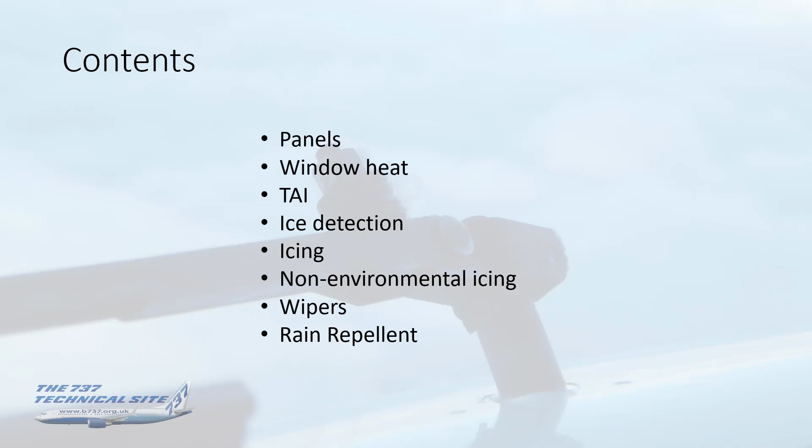Okay, back in the beginning on the original series, the 1 and 200s, there were several significant differences from later generations. The first one was that, surprisingly, although the originals had an alpha vane, it wasn't heated. There's no left alpha vane caption on the pitot static panel.

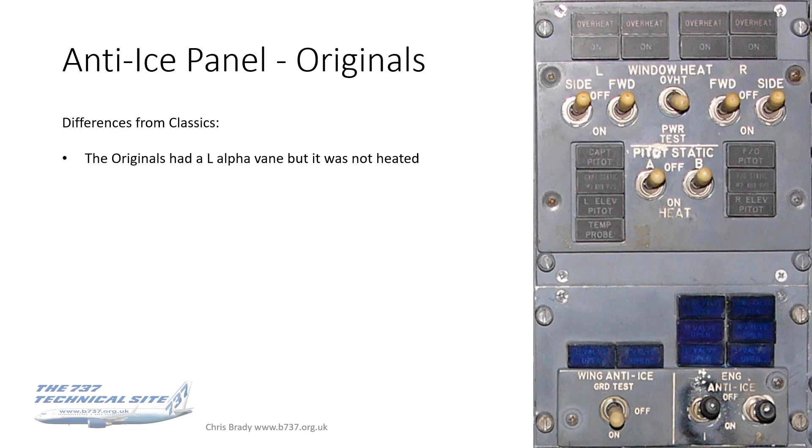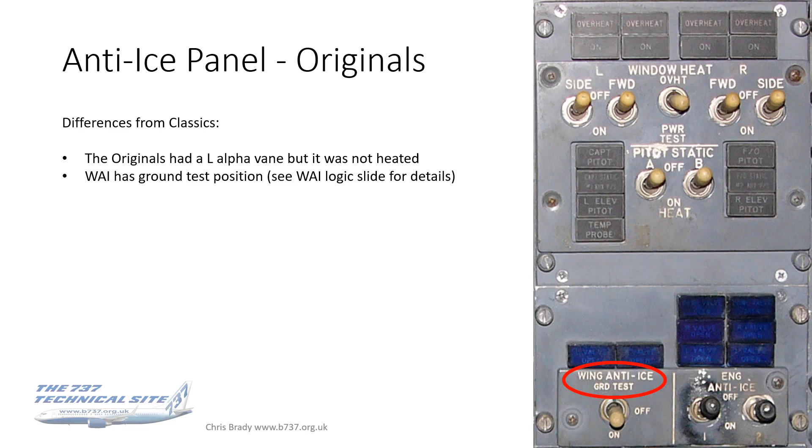The wing anti-ice had a ground test position, as you can see down there, so it's a 3-position switch. I'll come on to the logic of that on a later slide, because this was also used on classics as well.

The engine anti-ice captions were quite significantly different. So cowl valve open, this one was actually the same as later generations. It shows that the engine nose cowl leading edge is being anti-iced by 13th-stage bleed air, tempered with ambient air. That's a slight difference, because bleed air on its own would be too hot, so they actually mixed it with ambient air. But note that there was no amber cowl anti-ice caption, just the blue cowl valve open.

The difference captions were these left and right valve opens in blue. They show that the engine inlet nose dome, so the spinner, was heated. Also the compressor inlet case and inlet guide vanes. They were all anti-iced by 8th-stage bleed air, and all of this was unique to originals.

I think there's a school of thought which would say that having the spinner de-ice was quite useful. I've certainly encountered some quite strong icing on the spinner. But of course, those of you that have seen my powerplant presentation will have seen the development of the spinner from conical to elliptical to coniptical, to try and eliminate the need for anti-icing there.

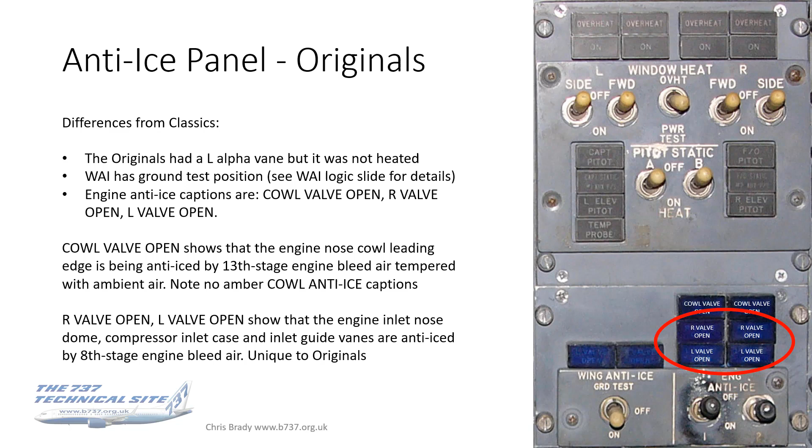Anyway, I digress. So with the classics, there were the following changes: the left and right alpha vanes, because there were 2 on classics and later generations. They had heated probes and were annunciated, as you see there.

Only 1 temperature probe. Oddly enough, many of the originals had 2, but at least it was heated.

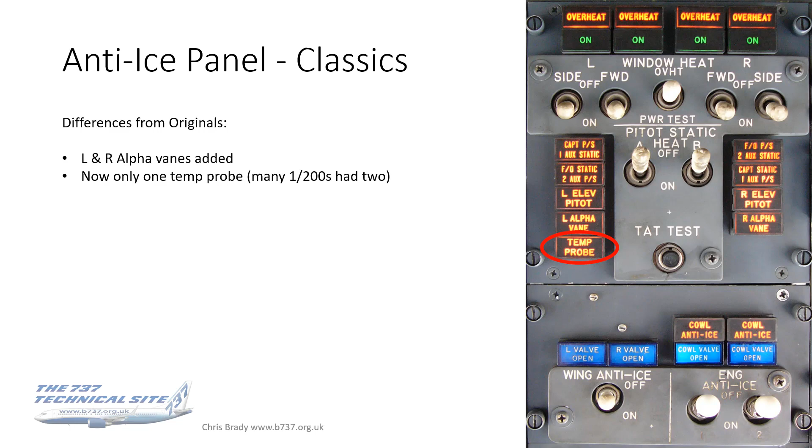The TAT test button made an appearance with the classics. Now this is only fitted on aircraft with an aspirated temperature probe, so you can tell by looking at this panel whether your temperature probe is aspirated or not.

So the probe was unheated on the ground to prolong the life of the element. So you wouldn't quite know whether it was heated or not by switching the pitot statics on. So that's why you've got the TAT test button.

If you press this, it simulates an airborne condition and allows the probe to heat up. So if you press that and an amber light illuminates, then you've got a fault on it. If you've got the pitot statics off, you won't see any change because they'll all be extinguished. If you've got the pitot statics on, pressing this will illuminate that light. So it's just testing an airborne condition.

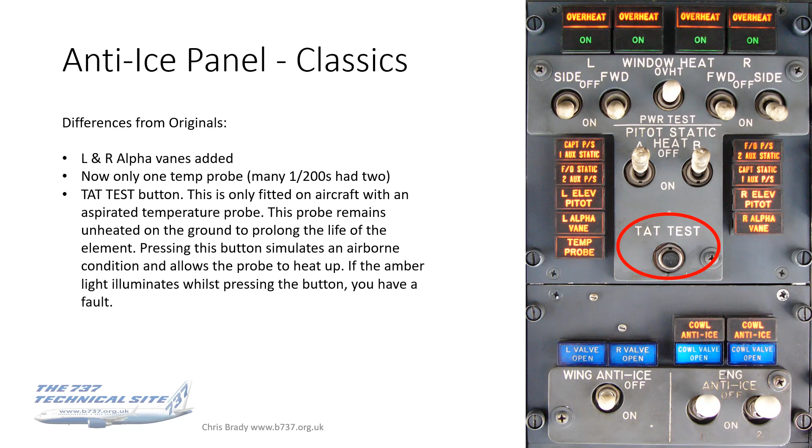On the NGs, there's an optional either green on or amber off lights with the window heat. The photo here is actually of the green on. With the amber off lights, this is just fitting in with the dark cockpit concept, so you won't have the 4 green lights blazing into your eyes on a night flight.

What you will see with the window heat on and functioning normally is nothing, which is great. If there's a fault with the window heat, then you will get an amber off light.

The panel's called a subtle difference here. It's actually called probe heat, and on the originals and classics, it was called pitot-static heat. The reason they needed to change it was because the static ports are not actually heated anymore, so they can't really call it pitot-static heat.

I've highlighted the difference there that you can see with, well, in this example, Captain's pitot. So the statics are now no longer heated. That's the takeaway point from there. Auxiliary pitot is now a thing and is added, and is heated.

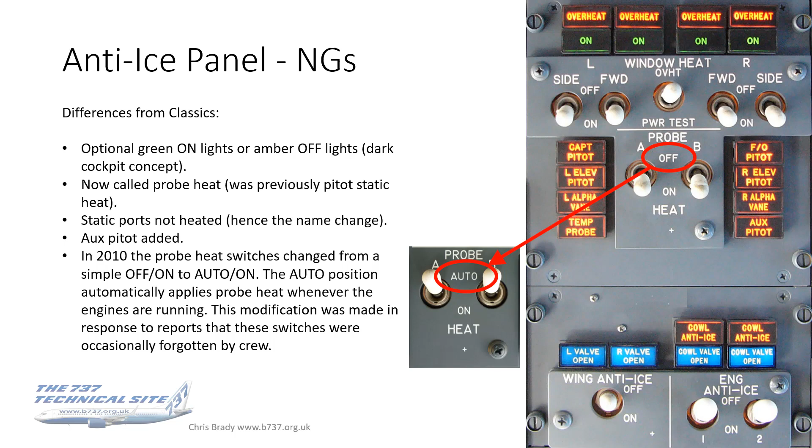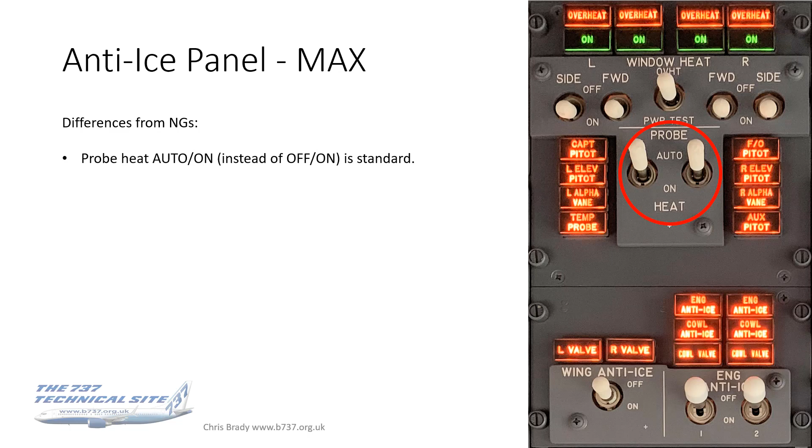On the Max, the auto-on probe heat position that I've just been speaking about is now standard. The engine anti-ice panel has got a new amber caption, which is engine anti-ice. So we're actually back to the stack of 3 captions that we had way back on the 1/200 series. I mean, obviously they're different, but it's interesting to see it come full circle.

These engine anti-ice captions illuminate when the engine cowl anti-ice system has been inhibited due to a system failure, or when the engine core anti-ice valve fails closed. So it's telling you that there's a problem with the anti-ice and it's no longer being supplied.

The other change is that these 4 lights along the bottom row, if you recall, they all used to be blue, and they all had the word 'open' at the end of them - so it was left or right valve open, cowl valve open. What Boeing have done is they've removed the word 'open' and changed the logic, and got rid of the blue. Now they will only illuminate if they're in transit, which is normal, or if the valve's in disagreement with the switch position - in other words, it's not working as intended.

So if you were to switch wing anti-ice on and you weren't getting wing anti-ice, you would have one or both of the valve lights in amber, and the same with the engine anti-ice. So again, for my money, this is an improvement. It's a bit more logical, and it's showing better functionality than the old blue light system, and it keeps things standard with the rest of the amber caution logic throughout the aircraft. So yeah, I'm a fan of these changes.

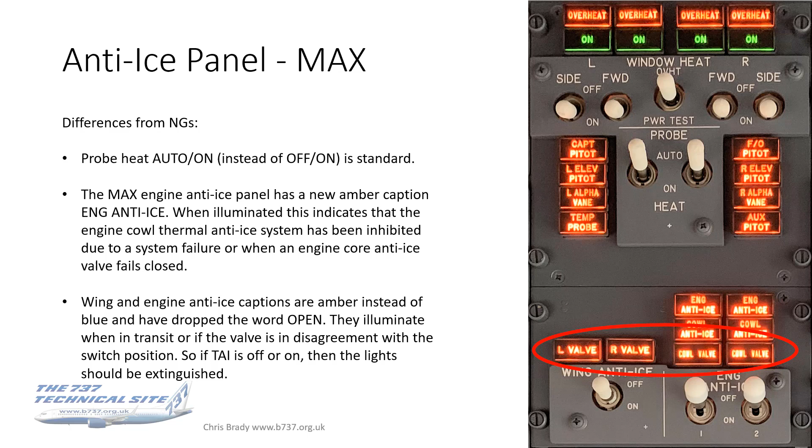All right, on to window heat. Windows 1 and 2, so the front and side window, and 4 and 5 if you've still got them installed, these are electrically heated. There is a customer option for window 3, that's the rear side window, to be heated as well.

Now the window heat works by passing a current through a conductive coating in the laminate, and this is - you can't see it, so I'm not able to photograph it for you - but this conductive strip runs the full length of the top and bottom edges of the windows to send the current all the way through.

A common misconception, if you ask some folk, is that these things I've got in the photograph are where the window heat is introduced. They're not. They are the primary and spare temperature sensors that you see in this photograph, the resistance type temperature sensor, and these feed back into the window heat control units, which I'll show you in a second.

You only need one of these to work at any one time. You've got a primary and a spare, and that really is just for ease of maintenance - that if the primary were to fail, you don't have to replace the whole window until the second one fails, because replacing the window is a big job, and it saves you getting stuck down route. So that's what these are - just temperature sensors to detect an overheat condition. They're not where the full window heat current is introduced.

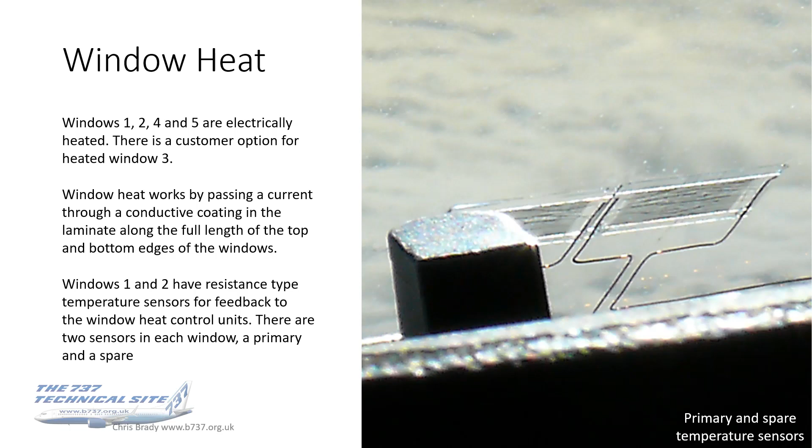So about the window heat switches: if window heat is switched on but the on light is extinguished, then that could be because the heat controller has detected that the window is becoming overheated. Now you often see this when you're parked up on a turnaround at a hot destination, and the sun's beating in through the window, and if you happen to look up at this panel, you may notice - it's often the rear side, or the left or right side windows that this happens on - that one of the green on lights is extinguished.

This is not a problem if it's a hot place. Just touch the window, and if it feels hot, then that's probably what's happened.

This window heat will be automatically restored when that window has cooled down. Now if you're concerned about it and want to verify that window heat is still available, you can do a power test. Move this spring-loaded switch in the middle down to the power test position, and the green on light will come back on.

Don't hold it there, because you don't want the thing to go to a full overheat condition, but just momentarily blip it down, check that the green on light comes on, and then you've got the peace of mind that the system's still functioning normally.

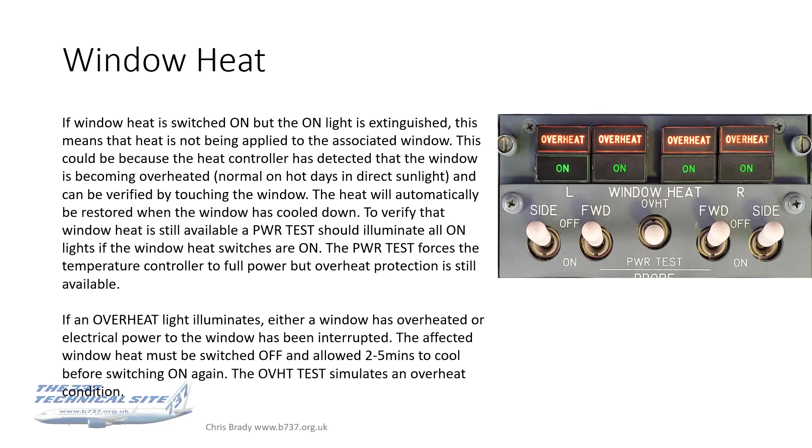So there's two stages of overheat. There's the not fully overheated, becoming warm, which will take power off, and you'll see the green on light extinguish. If it goes beyond that condition and fully overheats, you'll get the amber overheat light.

Okay, I said I'd mention the window heat control units. These are they, 4 of them, and they're in the E&E bay. I can't let one of these presentations go without showing you one of these, a unit in an E&E bay. Well, this is today's.

Obviously, as pilots, we'd never have need to see these units. It's all in the realm of the engineers, but personally as a pilot, I find it interesting to see these things and see what they're like, and see what's going on behind the scenes.

So each window heat switch, 4 switches, has got its own control unit. 4 switches, 4 control units. These control the power to the windows.

They monitor the window temperatures. They control the on, or amber off and overheat indications. They've also got BITE tests in them, which illuminate if there are faults either in the control units, the window sensors, or their power sources.

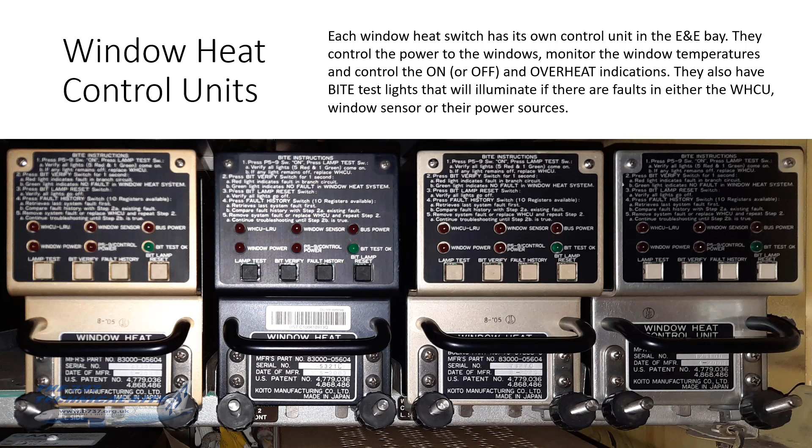So these are the brains and the computers behind each one of those little switches that you switch for window heat.

Okay, on to engine anti-ice. It uses 5th stage air, augmented by 9th stage bleed air, from the associated engine to heat the engine cowl to prevent ice buildup. The fan blades and the spinner are not heated.

Unlike the 100/200 series, where the spinner was heated and the stator vanes were, on the Classics, NG and the Max, they're not heated, which is how you can see photographs like this of ice formation on the spinner.

And where the ice also forms - this is a top tip for you when you're doing your walkarounds - you may not see the ice just because it's not on the spinner. Doesn't mean to say it's not behind the fan blades. The place where it forms first is behind the fan blades, so that might be easy to miss on a walk around.

So if you think icing conditions are or have been present, maybe worth just putting your finger behind the blades just to detect if ice is there. It forms there because that's the pressure difference between the face and the rear of those blades. That's why the ice forms there.

Engine anti-ice is an anti-icing system, so it can be used continuously and should be used continuously in icing conditions. The amber cowl anti-ice lights will illuminate if there's an over temperature, 440 degrees C, or over pressure condition in either duct. In this situation, thrust on the associated engine should be reduced if conditions allow until the light extinguishes.

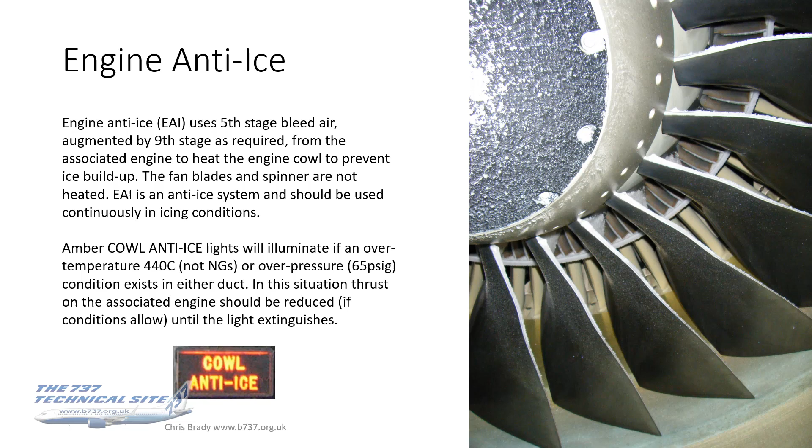Okay, on to wing anti-ice. Unlike engine anti-ice, the wing anti-ice uses bleed air from the main pneumatic manifold. This is to ensure that you've got a source of bleed air during engine out operations.

Only the leading edge slats have got wing anti-ice, not the leading edge flaps with the surfaces inboard of the engine. So it's only the surfaces outboard of the engine. And furthermore, on the NG and the Max, the outboard slat is not de-iced, as you can see from the photograph. That, I believe, is due to the excessive bleed requirements there would be if that extra slat was also de-iced.

Now, I must admit, the first time I saw it, I was a bit horrified. I mean, of course, I'd done the differences course and read the manual, but it had, I must admit, passed me by that the outer slat was not de-iced until I saw it for real.

Boeing have obviously assessed this and decided that the associated loss of lift on that outboard portion of the wing, I guess due to the taper of the wing, because the chord's so much narrower there, is not significant. The bulk of the lift of the wing comes from the inboard section. That's where the wing is thickest, that's where the greater area is. Out at the tip, there's less lift. So I guess Boeing said it's okay. Surprising, but there we go.

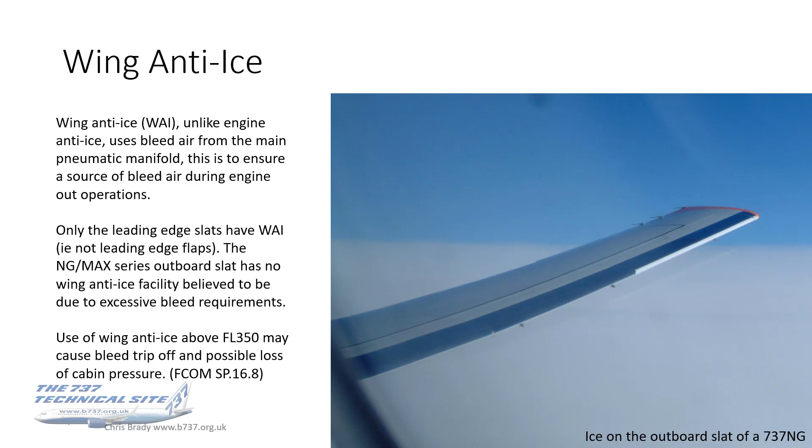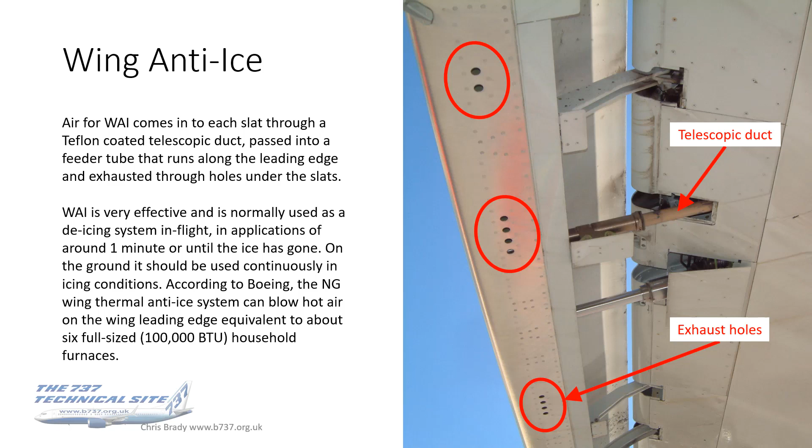On the ground, it should be used continuously in icing conditions. And a random fact for you that Boeing released: according to Boeing, the NG wing thermal anti-ice system can blow hot air on the wing leading edge, equivalent to about 6 full-size, that's 100,000 BTU household furnaces. There you go, who knew? So it's a heck of a lot of hot air.

The logic for the switches in the operation is that on the ground, the wing anti-ice valve, this is not the switch, will cut off if either thrust lever is above the takeoff warning position - that's 32 degrees on the classics or 60 on the NGs - or if an over temperature condition is detected. But it'll be restored after the thrust is reduced or the temperature drops, and it's done this way to allow you to perform engine run-ups without having to check that the wing anti-ice is still on afterwards, which is again great news for us.

It's another pilot saver there. The switch, though - because what I was just talking about there was the valve - but the switch is solenoid held, and that'll trip off at liftoff. This is for performance considerations because, as we've already discussed, the bleed air penalty for wing anti-ice is considerable.

On early systems - so this is on the lower photograph - those with the ground test position like was fitted on the originals and some classics, the wing anti-ice switch on the ground, wing anti-ice is inhibited until liftoff. So it's armed, and this is opposite to the present system, so a little bit confusing there. Fortunately, that's gone, and we've just got the nice, straightforward, very logical two-position switches that we've got now.

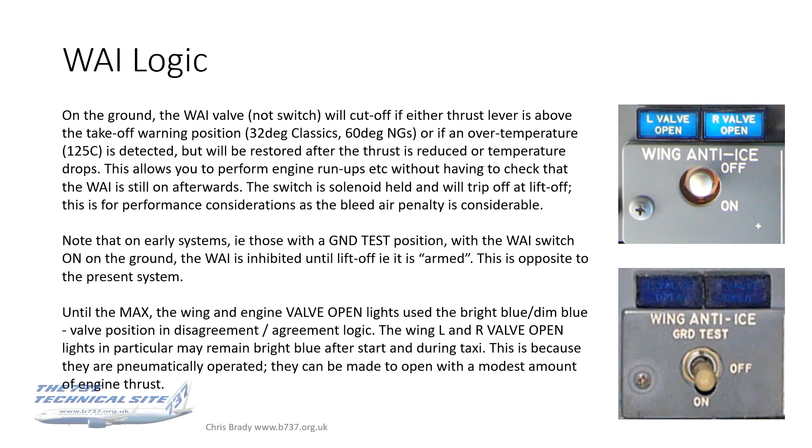The anti-ice has an effect on speed and certain limits. So whenever wing anti-ice is used, the SMYD, this is only on the NG and the Max, applies a thermal anti-ice bias. This increases the stick shaker and the minimum manoeuvre speed bars by enough to account for 3 inches of rough ice on the leading edge devices. Now, what exactly that amount is in knots depends on a whole load of things, the specific variant of the aircraft and various other factors, so that's why we can't say how many knots it puts on. All we need to know as the pilot is that it puts on enough to account for 3 inches of rough ice, which is a heck of a lot.

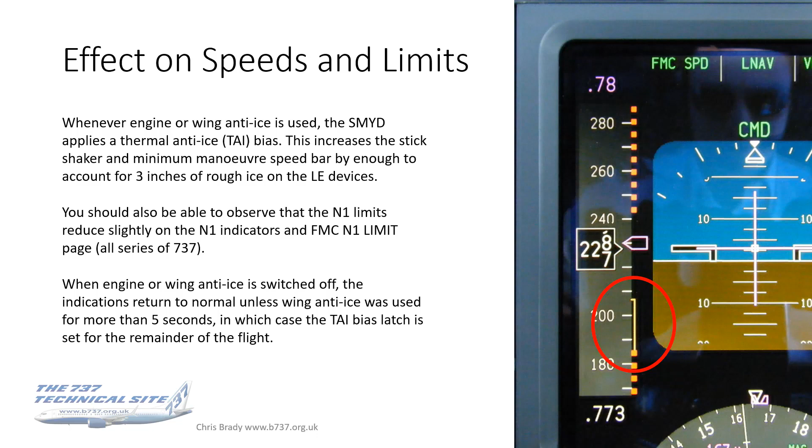You'll also be able to observe that the N1 limits reduce slightly on both the N1 indicators and the FMC N1 limit pages, and that happens on all series of 737s. When the engine or wing anti-ice is switched off again, the indications return to normal, back to where they were before, unless wing anti-ice was used for more than 5 seconds, in which case the TAI bias latch will be set for the remainder of the flight.

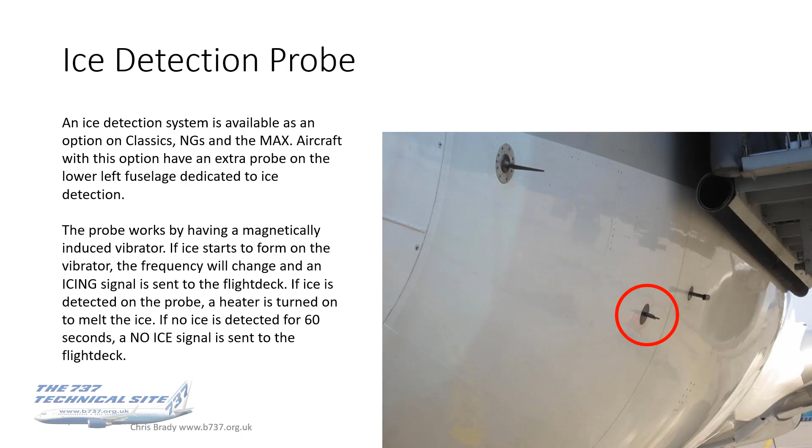Ice detection now. There is an ice detection system available as an option on classics, NGs, and even the Max. Aircraft with this option have got an extra probe on the lower left fuselage, the ice detection probe. That works by having a magnetically induced vibrator inside it, and if ice starts to form on the vibrator, the frequency of the vibration will change, and an icing signal is then sent to the flight deck. If ice is detected on the probe, a heater is turned on to melt the ice so the probe continues to function. If no ice is detected for 60 seconds, then a no ice signal is sent up to the flight deck, and in the flight deck what we see are the 2 lights up there, icing and no ice.

So when the probe senses an ice build-up, the icing light illuminates. When ice has previously been detected but the probe is no longer detecting ice, the icing light will extinguish and the no ice light will illuminate. It's a bit annoying flying these sometimes because they need to be pushed to cancel each time. I get it with the icing light, but the no ice light, really, do we need to push to cancel that? Anyway, that was the logic, and that's what we have. I guess it's better than nothing. There's also an ice detector amber light on the anti-ice panel, which will illuminate when the ice detection system fails.

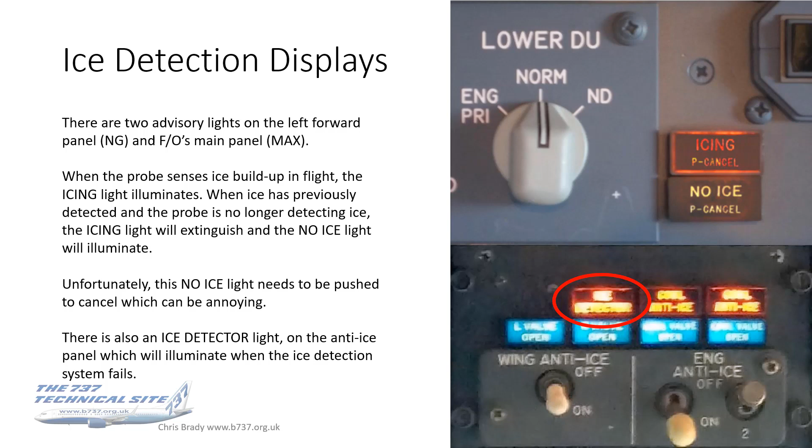Before the days of the ice detection system, on operators that had it, we just had this matte black band on the leading edge. It's entirely at the operator's discretion whether these are fitted. What I've found is that airlines that operate in northern climes have these. Norwegian have got these, and I think Maersk had them, probably SAS did as well. So they're operators which are used to operating in more conditions of icing, and I guess they found them useful. I find it's very much up to the individual crew whether you find them useful or not. They don't always work, but I guess they're better than nothing.

Now these are normally applied at the outermost point of the de-ice sections of the slats, where they can be most easily seen by crew. There's no point in putting them on the outboard slat because that isn't de-iced. But you want them on the most outboard position of where the de-icing is, so that you can easily see it from the flight deck windows. On the 800 and 900 series, and even more so on the Max 10, it's difficult to see too much of the wing because it's that bit further back.

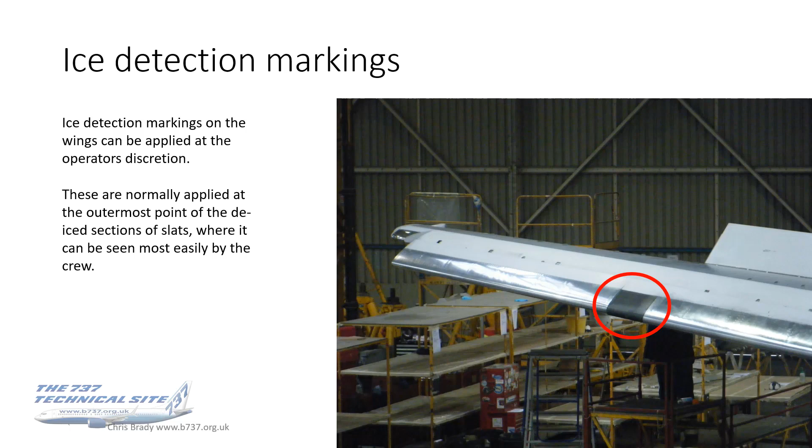Okay, so on to airframe visual icing cues. It's up to the crew to spot ice formation and take the necessary action. So what I've done over the next few slides is put in a couple of photos of some places where ice accretion is visible from the flight deck, just to help your decision making process as to what kind of ice you've got.

Again, I emphasize that engine anti-ice should be used whenever the temperature and visible moisture criteria are met, and not left until ice is seen, to avoid ice buildup which may shed into the engine. I stress this point because guys coming from other aircraft types may have used engine anti-ice in a different way, but certainly on the 737 we use it all the time the ice criteria are met.

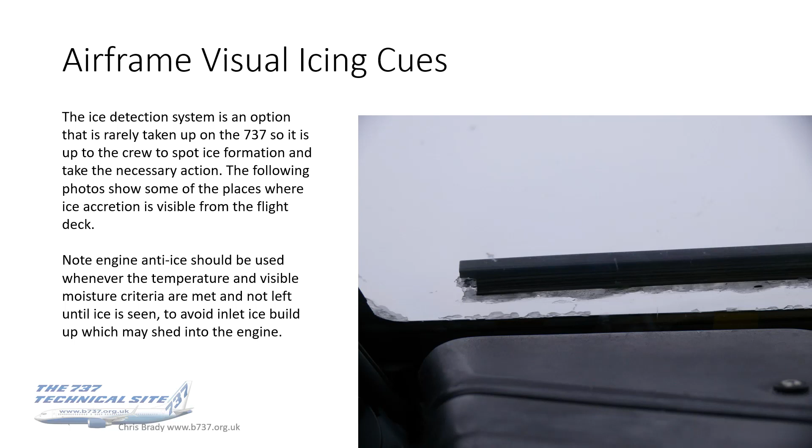Okay, so ice under the windscreen wiper blades, it's one of the first places that ice will form. What actually happens is that rain, if it's falling, or indeed moisture from clouds will impact the windscreen below the wiper. It will melt because of the window heat, if it was falling as ice, and it will run up to the bottom of the wiper and get caught in the corner there, in that stagnation point.

The pressure is low in there. It's different to the rest of the windscreen because of that stagnation point, and ice can form there where it would not normally form on the rest of the aircraft because the pressure is different there. So that, to me, is a first sign of icing, but it's not actually indicative of ice accretion on the rest of the airframe. That, to me, is light icing.

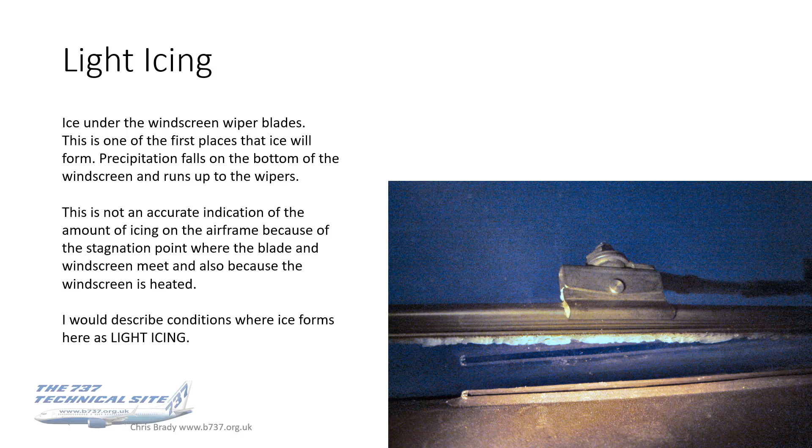Now, when you get icing forming on the wiper nut, there is no stagnation point there, and if icing is forming there, it will also be forming on the rest of the airframe. The weight and aerodynamic effect of ice forming not only on the wiper nut, because that's obviously insignificant, but on the rest of the airframe is significant, and this is why you've got a residual ice penalty of several tons on the landing field length limit graphs in the flight planning and performance manual.

As an example, for those of you that haven't got a copy of this manual, for a 26k 737-800 with winglets, on the auto speed brake graph, so this is the normal one we'd use, it states decrease weight by 6,800 kilos if icing conditions are forecast during any part of the flight. So obviously, whilst that's a dispatch thing because it's talking about forecast, it still goes that Boeing consider the effect of airframe icing to be so significant that it gives you a nigh on 7-ton penalty for landing field length.

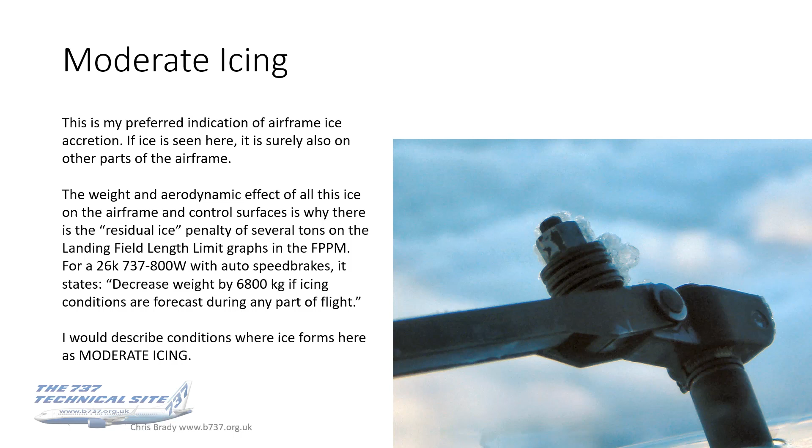Now, these photographs, the top one was in a Classic, as I recall, the bottom one was in an NG. For ice to form on a flat, heated windscreen, conditions must be pretty bad. On the lower photo, you can actually see the shape of the airflow lines in the ice formation there. From memory, we were going fairly quickly. I think that was climbing up through the top of clouds. We must have been doing 280, 300 knots, and yet ice was still forming.

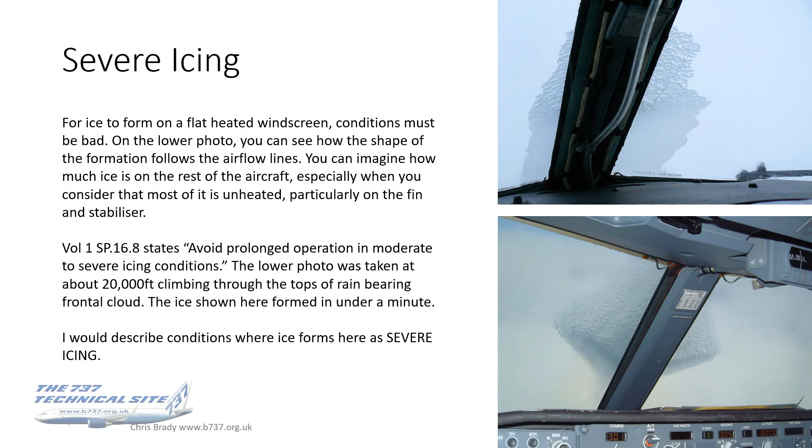Volume 1 supplementary procedures states avoid prolonged operation in moderate to severe icing conditions. Now, obviously, sometimes it's unavoidable, and in this case, it was. We were climbing through cloud-bearing or rain-bearing cloud, frontal cloud, and that ice formed very, very quickly. It went from nothing to as you see in that photograph, in under a minute. That to me is severe icing, and those are the conditions that the Vol 1 is telling you to avoid prolonged operation in.

It's officially known as wing upper surface non-environmental icing, or cold soaked fuel frost. The reason for the formation of this is the increased surface area of the fuel that comes into contact with the upper surface of the wing. And this is because the fuel tanks on the NG were moved outboard to accommodate the longer landing gear.

That was required for the increased fuselage lengths of the NG family to reduce the risk of tail strikes. So it all comes back to the fact that on the NG they were anticipating an 800 and a 900 series. And for those of us that flew the 400, you recall how tight the tail strike risk was on the 400. So Boeing overcame that by increasing the length of the landing gear, and the domino effect of that, the kind of butterfly's wing effect, was this cold soaked fuel frost.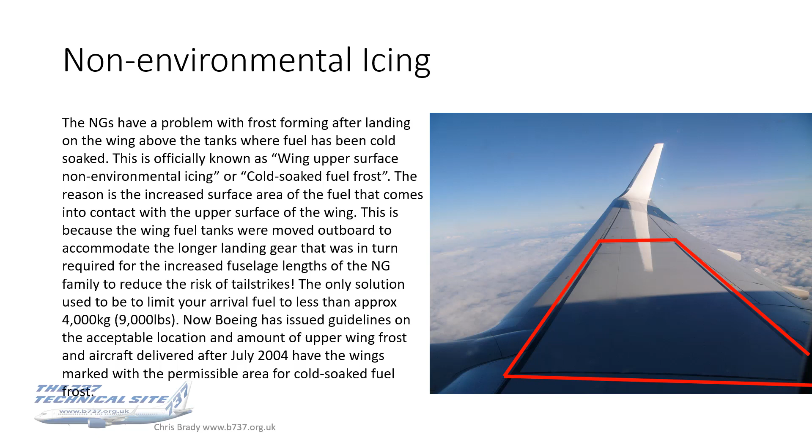Anyway, fortunately Boeing issued guidance on the acceptable location and amount of upper wing frost. Aircraft delivered after July 2004 have had the wings marked with the permissible area for cold soaked fuel frost, and other aircraft can have it retrofitted, the markings applied, and the markings are those given in the red area there.

The photograph I do have is underneath, which is arguably just as useful. Now, the Boeing advice for what frost is permissible underneath is as follows.

Flight crews should visually inspect the lower wing surface. If there is frost or ice on the lower surface outboard of measuring stick 4, there may also be frost or ice on the upper surface. The distance the frost extends outboard of measuring stick 4 can be used as an indication of the extent of frost on the upper surface.

Well, that's great if you know where measuring stick 4 is, and that's part of the reason why I've put it here. So the measuring sticks are those small red circles that you see in the inspection panels, and I've shown measuring stick 3 on the photograph. Measuring stick 4 is 3 inspection panels away from that, so I've photoshopped it on up there as the location of measuring stick 4. So if there's any frost out there at measuring stick 4, then you probably need to get de-iced.

Now, it should be noted that if the thickness of frost on the lower surface is greater than 1/8 of an inch or 3 mil, then a physical inspection of the upper surface frost is required. Well, we don't go around with a ruler to measure exactly what 3 mil is. You can, if you can reach, try scraping it with your thumbnail and estimate it.

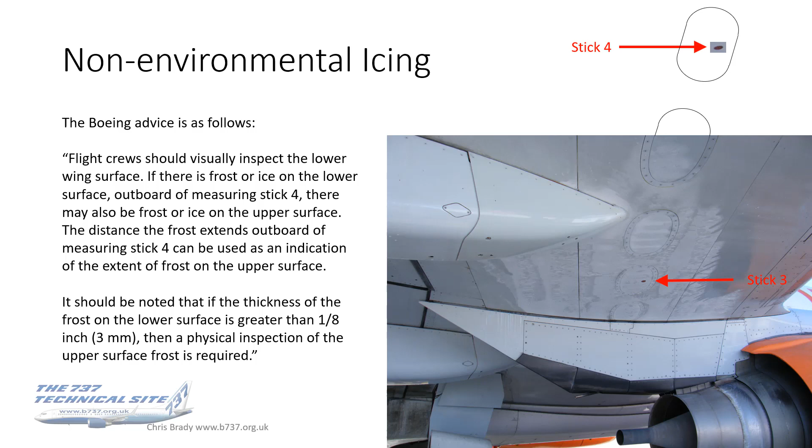Again, these are just my own guidelines, not official Boeing advice. You as the crew on the day have got to make your own decisions. But those are the criteria I use, and you may find that helpful to assist your decision-making process.

Now, other non-environmental icing, this is the common one. Sometimes frost can be seen along distinct lines along the vertical stabilizer. It's another form of non-environmental frost, but this actually forms where the skin is touching the spars inside the fin, which have become cold soaked on a long flight.

Now, my view on this is that as the fin is a non-lifting surface, this frost is acceptable. If you think what the fin is for, it's for directional stability, and that, to me, is not affected by this frost. This frost also probably doesn't have any significant effect on the operation of the rudder either.

And I think for anybody that says it is, if you're worried about the effect this frost might have on the rudder, which for me would be the only argument for why this should be removed, then cast your mind back to the effect of ice on the outboard slat and the effect of that on the aileron. Now, if Boeing considered that the outboard slat could not be de-iced and that the aileron function was unaffected, then I would suggest the operation of the rudder would be unaffected by this frost here.

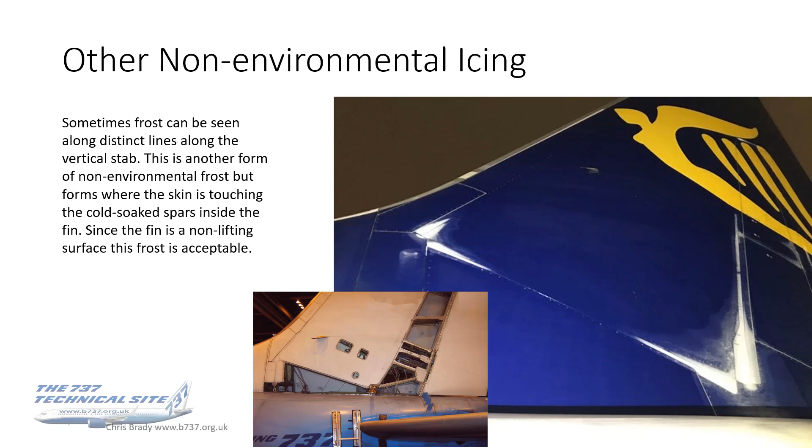Okay, onto the windscreen wipers.

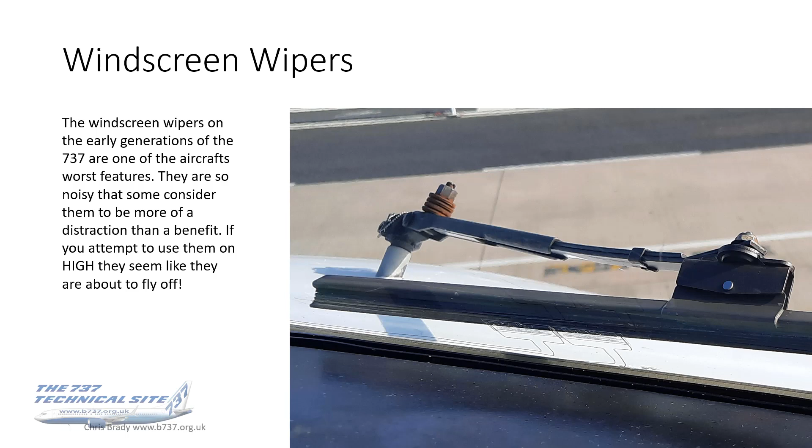I would say that on the early generations of the 737, the windscreen wipers were one of the aircraft's worst design features. They're so noisy that they're probably more of a distraction than a benefit. And it always seemed like if you ever attempted to use them on high mode, they felt like they were about to fly off. Awful things. But there we go, that's all we had.

One of the most welcome new features of the NG and also on the MAX is the vast improvement to the windscreen wipers. They can be independently controlled. They've got an intermittent position like the originals had. If you look at the photo top left, you'll see they had a low, 1/2, and 3/4 position, which was done away with on the classics but came back on the NG. But the best thing of all about the wipers on the NG is that compared to the originals, they're almost silent, so you can use them without distraction.

Note that on the NG and the MAX, there is no rain repellent, which is there on the originals and the classics, and that's the reason for the gap above the right-hand wiper control on the NG.

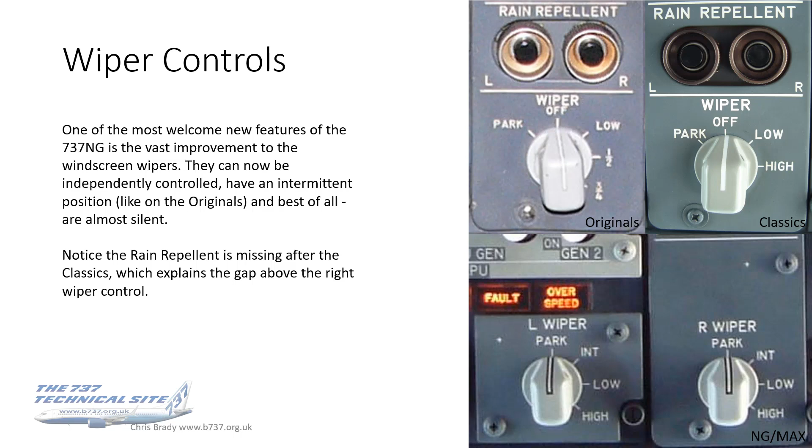So, talking about rain repellent, this is what it looked like, and if you've not been on the 737 for a decade or two, then you'll have probably never seen this. Rain repellent was something that you squirted onto the windscreens to stop the rain being on there. It was a hydrophobic liquid.

It was removed due to worries about the environment and the health effects of the fluid. It was called RainBoe, and it was a low toxicity solvent, but unfortunately it contained Freon 113, which is a CFC.

The canisters which held it were stored behind the captain's seat, as you can probably just make out the track there on the photo. They had been known to leak, particularly after a change of canister. And as I say, it was low toxicity, but it was enough of a concern that the pilots and the pilot unions pressed Boeing to do something about it.

In 1991, Boeing added a substance called D-limonine, which had a strong smell of orange peel, so that if it leaked, if you smelt oranges in the flight deck, then after landing you'd get out and tell an engineer to have it cleaned up, so that you didn't have to inhale the fumes.

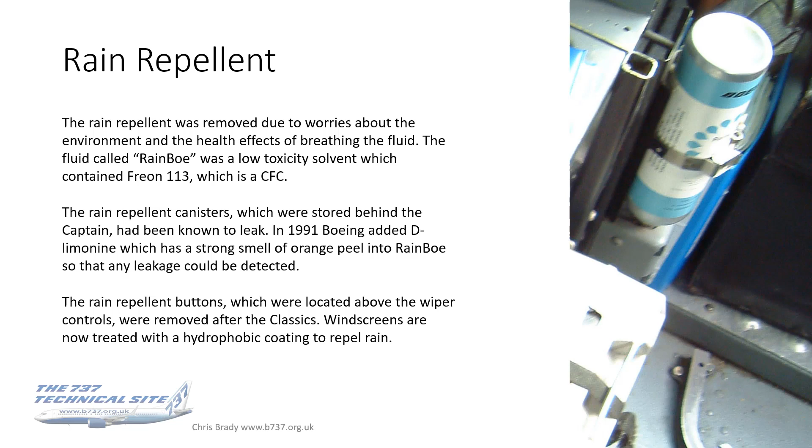One final word about the rain repellent. The graphic up there, top right, the newspaper cutting, that was a sad end to a 737-200 in May '82. This one was written off by a heavy landing in a rainstorm, and the report stated that the pilot's misuse of rain repellent caused an optical illusion. I haven't actually seen firsthand the report, but they're the extracts which are often quoted.

Anyway, rain repellent is a thing of the past. Since early 1994, all Boeing aircraft, so not just the 737s, have been built with a surface seal coated glass from PPG Industries, which has a hydrophobic coating.

The coating does deteriorate with time depending on wiper use. So again, top tip to us all out there: if you use wipers on dry windscreens, apart from the fact it will be noisy and ineffective, you'll actually be removing the hydrophobic coating from the windscreen. You could also scratch the windscreen as well. So really try not to use the wipers when there's very little rain on the windscreen.

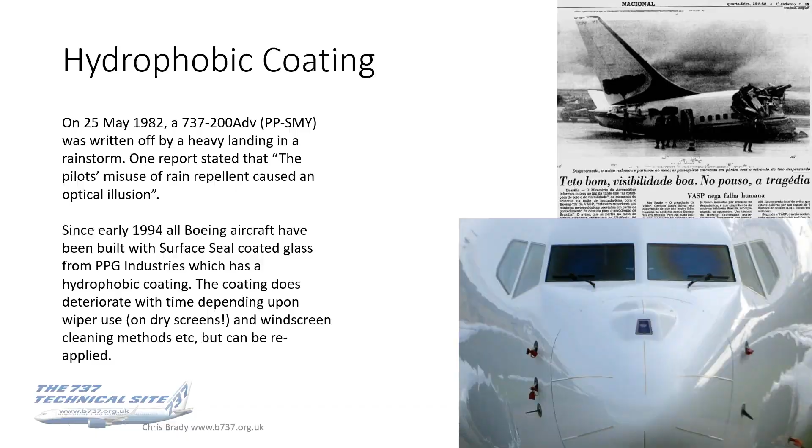So that's it for me on ice and rain.